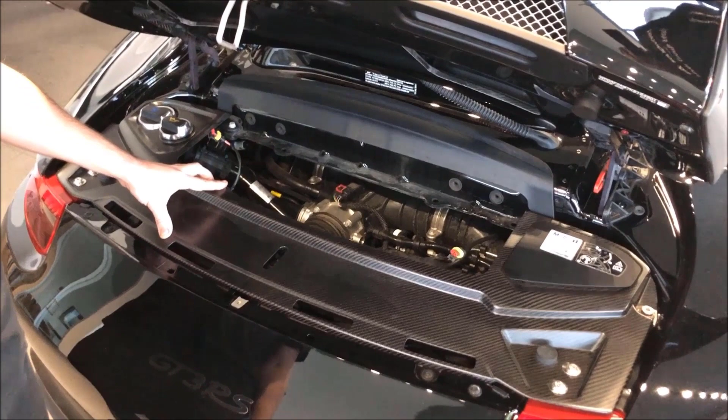Are you kidding? That's what this car is made for. Do you think the driver could flatten the curve? Wow, I like that. Speaking of flattening the curve, what engine is in this thing? This one has the Flat 6 4-liter, specifically designed in Germany just for the track. Wow, okay, so really, it's left up to the driver. Let's see if he can bring it, because we obviously know that the car can handle it. Excellent. So let's really see what a Flat 6 sounds like, to see what our driver is going to be doing for us.

Before I throw it over to the driver, he's anxiously waiting for these keys, but he will have his opportunity to drive like the way he wants to and flatten things out.

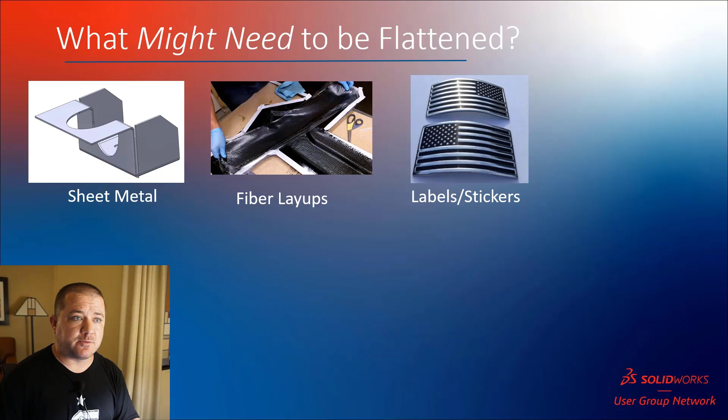When you talk about flattening things, it's important to understand what might need to be flattened. Okay, sheet metal ought to be obvious. That's the first thing that comes to mind. But what about things like fiber layups, right? You're putting sheets of fiberglass or carbon fiber into a mold. Maybe you're making a label or a sticker or something that's got a form fit over another part. Maybe you're doing NC cutting.

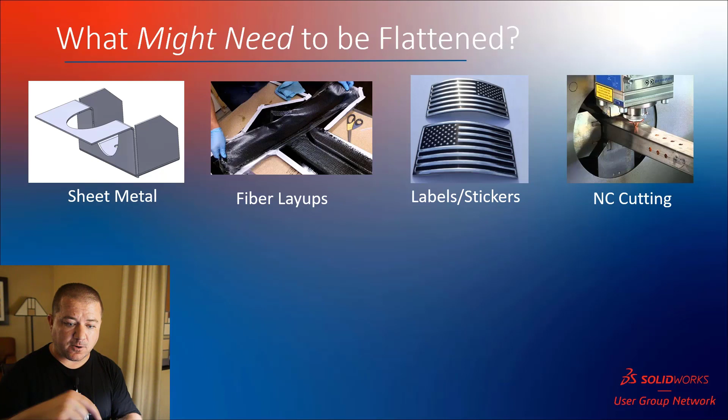A lot of tube cutters cut as a flat shape, but they're actually cutting it around the perimeter of that tube part. So you're going to cut the holes all the way around and then you're going to flatten that out and send it over to the NC machine.

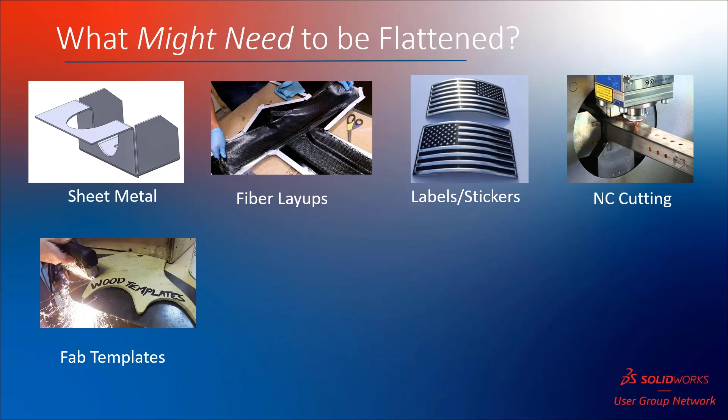Sometimes you've got fab templates where you're creating something really weird shaped or possibly something that's almost impossible to measure. And so you're looking for some way to transfer the design using paper or something else that tends to be flat. You start to get into things like fabric and upholstery, then you start to get into stretch, and that starts to get a little bit more complicated.

Thermoforming, you don't generally actually need to flatten thermoforming. I always thought thermoforming would need to be flattened, but you're always taking just a rectangular or whatever the machine takes, and then you just trim it off when you're done.

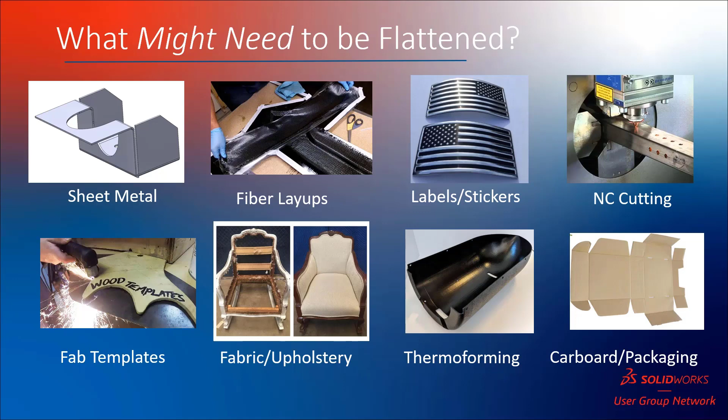So keep that in mind, that sometimes you need to flatten something, but the flat pattern is actually not important at all because the machine needs to have square stock. We also got cardboard, packaging, all kinds of stuff. The possibilities of what might need to be flattened is a pretty big list.

The question then becomes, okay, why do we need an accurate flat pattern? Because a flat pattern, I'll just give you a rectangle every single time, and as long as it's a big enough rectangle, boom, there's your flat pattern, right? Just trim to fit, beat to match, beat to fit, paint to match, right? So we want accurate flat patterns so that we can avoid trimming, which doesn't always apply. Thermoforming doesn't matter.

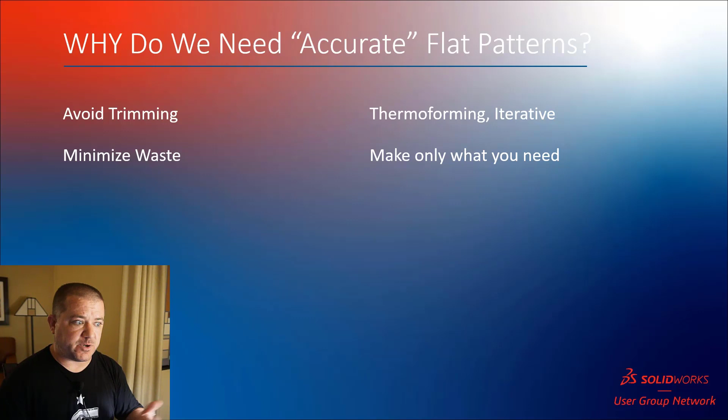An iterative design process. If you're not married to the design, you don't actually care about the extra time it takes to trim a prototype. So don't worry, does it really need to be that accurate? You do want to minimize your waste because you only want to make what you need. So trimming extra stuff not only is wasted energy, but it's also wasted material that you could have put into another part. You want to eliminate those extra operations.

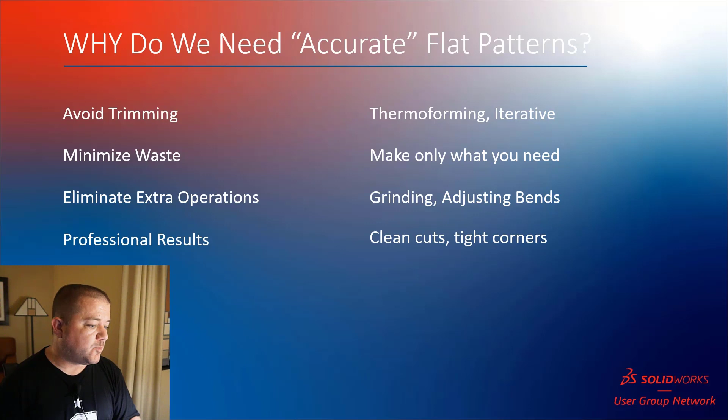A lot of times I find that if the flat pattern isn't right, you find yourself sort of trying to dial in the bends. You want your bend locations and your flat patterns to be perfect so there's no sort of excess at the end, no remainder. You want it to look really professional. You want tight, clean corners. You want to take advantage of the ridiculous accuracy that you get on a CNC machine, right?

Whether you're talking about a router, laser, plasma, whatever, you can flatten something and cut it out down to 1/1000th of an inch, generally speaking. Not necessarily repeatedly, but generally speaking, it's super accurate. And so then you can take that and use that as your assembly guides. You can make highly accurate parts, even though they need to be formed up.

If you know your parts are going to be accurate, you can get the parts out the door faster. You don't have to make a bunch of extras. You can just say, yep, I need 5. I'm going to print 5. I'm going to bend 5, and it's going to be perfect because I know it is every time I've got it dialed in.

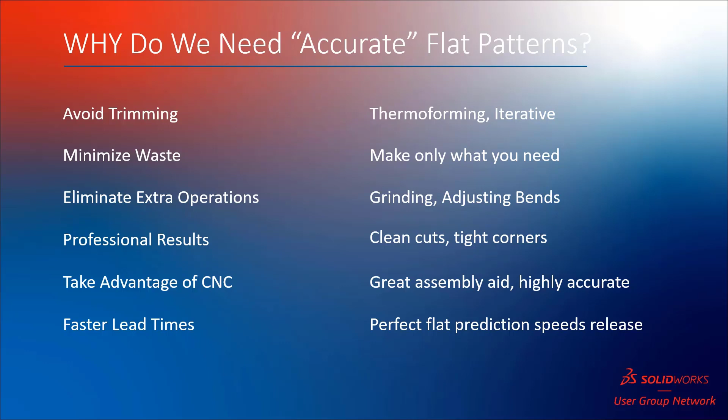Let's talk real quick about the anatomy of a sheet metal part that is a challenge to potentially work with. So what you end up doing is you look at a part that's crazy, and you say, okay, I could do it a lot of different ways, but first things first, focus on the largest part of the bends. Trace the outline and use a base flange, or if it's a rolled form, draw the arc of that roll. Try to get the bend in there first, because if you build the bend with sheet metal features, it's going to be a lot easier.

Now, for a really challenging part, you may have features that need to be added to the bent part, as well as features that need to be added to the flat part. So in this case, I'm trying to create a perfectly oval sticker or placard or something like that. And so I create the nice roll, because I'm not going to be able to roll it very well after it is turned into an ellipse or an oval. So I create the roll, I flatten it, I cut the ellipse out, and then I fold it back. And the flat pattern must solve.

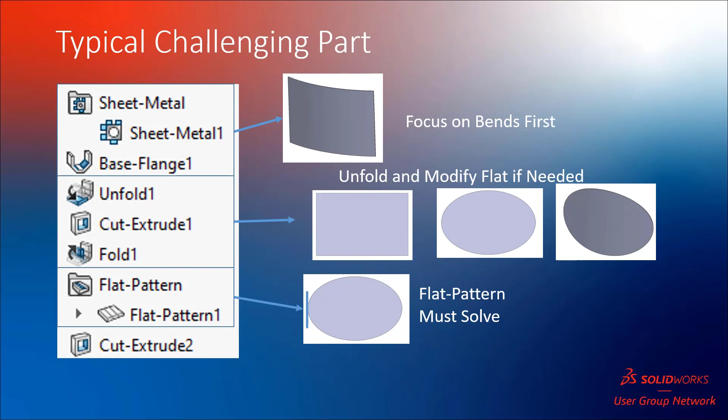Now, you may think, okay, well, that's obvious, but for those of you that have tried it, you know that at least in the past, you had to have at least one small straight edge to roll that back out with on a flat pattern. And so what I did here is on my ellipse, I left the tiniest little straight edge. And that straight edge allowed it to flatten, and then I did some cleanup at the end.

So that's kind of how a lot of these parts end up going. You end up working on it in multiple phases: the bent, the flattened or semi-flattened or in-process flattened, the flat part, and then anything after the flat part that needs to be applied to make that work.

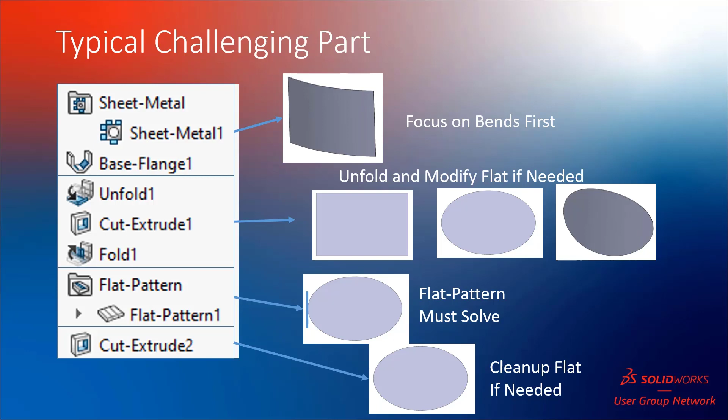All right, let's talk about the rules. Sheet metal has rules, and just like rules in the real world, if you break big rules, you got big problems. If you break small rules, you probably get away with it. Nobody's going to care. And if you break enough small rules, you're probably going to be cruising for trouble. So follow the rules when possible. If you can't, I understand. SOLIDWORKS is probably going to take care of you, like we'll see here in a second.

So one rule: constant thickness. In other words, if you're going to have 16 gauge sheet metal, it's got to be 16 gauge. You can't create a chamfer on one edge and sharpen it, because that creates a situation where it's not the same thickness there at the corners. So constant thickness. The exceptions being that you can create non-normal cuts and do a lot of stuff with them.

Also, if you have something that's going to end up stretching, like a formed part that's drawn out, theoretically that's going to change thickness in the real world. We're not going to calculate that. We're assuming the thickness stays constant even though you're getting a bunch of stretch. Sometimes with imported parts, the constant thickness is messed up, and sometimes with convert to sheet metal, you can't have it flat. You don't want it to be thin. You want it to be a big chunky block, and then you just convert it.

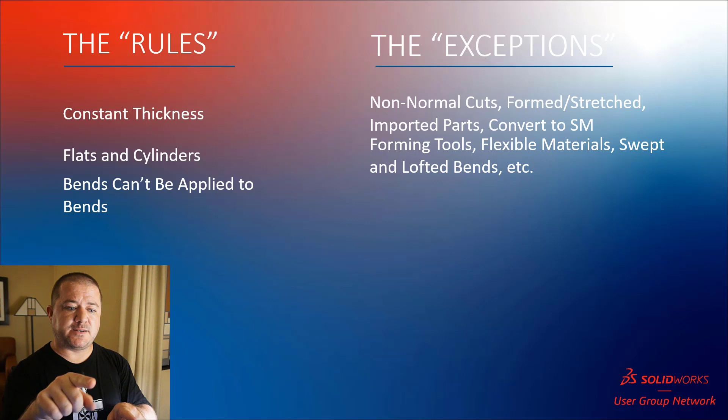You can't apply bends to bends. I don't know, 2020, they've changed this. If you're on an older version, this does apply. It used to be an arc touching another arc with no straight in the middle would be a problem. Or even worse, an arc that then just took off in another direction. That's a bend on top of a bend that's going to get added on top of another bend. It just gets crazy. SolidWorks is like, you know what, I'll just take care of that for you. So if you've ever run into a problem in the past where your lofted bend or your swept bend didn't flatten, it probably does now with no problem. It's just boom, automatic.

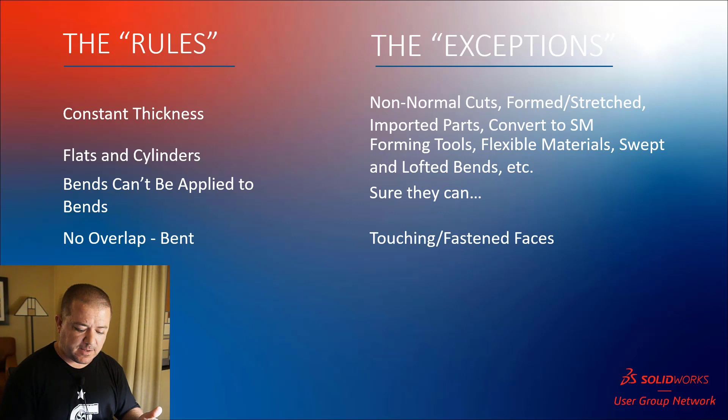You can't have parts that are overlapped. For instance, when they bend, if the parts are overlapping or intersecting, it can't physically happen, and it can't intersect in the flat. But there are times when, for whatever reason, you need to cheat, and SolidWorks generally is okay with you cheating. It generally gives you ridiculous, impossible things and lets you decide, is that something that I can accommodate through other means, right? Through stitching sheets together to create a flat that's impossible from a single sheet, but maybe it's from multiple sheets. Or maybe you've got two parts that need to touch because they're going to get spot welded together. Generally, that's going to work out fine, but just keep in mind, if you can keep a small gap in there, you're going to be better off.

The part needs to be manufacturable, and of course, this is all sort of just up to you because you're the one that's stuck with it if you can't manufacture it. But there are some really cool tools out there where you can create completely enclosed cubes, for example. I mean, if you're making it out of a piece of paper or cardboard, then you can bend anything, right?

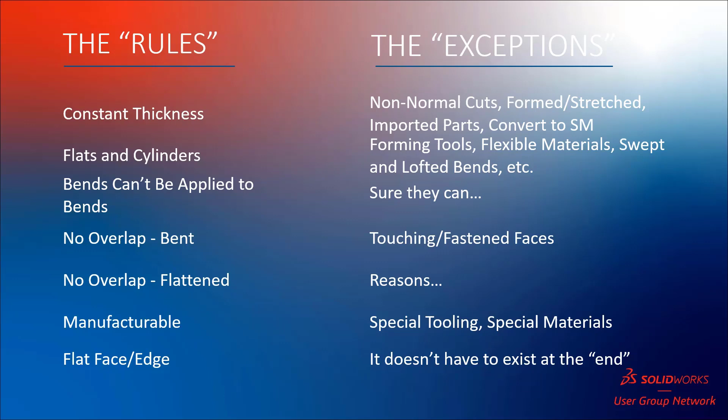So the last one, you need to have a flat face or a flat edge, and that's because the flat pattern feature at the bottom of the feature tree has to have something to say this is the fixed edge or fixed face. It's got to flatten relative to some fixed object. So make sure you have a flat face or flat edge. That one's a pretty good one, although keep in mind, kind of like with that elliptical label example I did just a second ago, you can have a flat edge that exists in the flat pattern but then gets trimmed or eliminated after the flat pattern in a post feature. Okay?

This is required knowledge. You need to understand bend allowance, bend deduction, K-factor, etc. Generally speaking, when you go and talk to the guy that runs your brakes, the guy that runs your lasers, everybody that works with sheet metal, and you ask them, explain to me what bend allowance is versus bend deduction and why would I use one or the other, you will get a different answer from every single person you talk to.

The thing of it is, bend allowance, bend deduction, those are old school AutoCAD 2D rules of thumb. They work really well, but they were based off of the same dies on the same material, and if you have a different bend angle or a different bend radius or a different die set or a different humidity in the air, it's going to stretch a different amount. And you'd have to manually keep track of this all. So I don't recommend using anything but K-factor, just for simplicity's sake. I'm lazy and you should be too.

So K-factor is usually 0.3 to 0.5, and the idea is K-factor is the percentage through the thickness that you're not getting either compression or expansion in the material. When you bend, it's compressing on the inside, expanding on the outside. Somewhere along there is a neutral line. If it's perfect, then that neutral line is exactly halfway through, and that's a 0.5 K-factor, which is the default SOLIDWORKS value. If the material has a tighter bend, if it's a thicker material, you'll start to see it drop lower down to about a 0.4, 0.35, 0.3 on the max side.

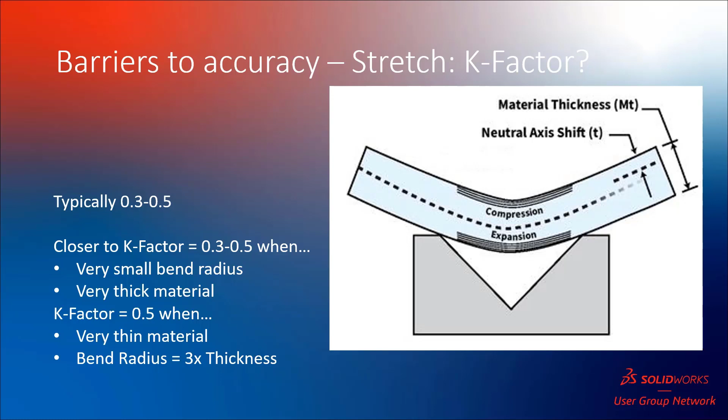So if you don't know what your K-factor is, make a 2-inch by 2-inch plate, apply a 90-degree bend to it in SOLIDWORKS, and then go cut a 2-inch by 2-inch plate really accurately, bend it, and sit there and measure it. And what you need to do is adjust your K-factor until the measurements you get on your sample part match what SOLIDWORKS is calculating.

It also helps to understand which direction you're solving for, because depending on what direction you're solving for, that's going to be where that K-factor applies. So for example, let's say you're doing a rolled cylinder, you know what the diameter of that rolled cylinder needs to be, you know the folded part. You design it in SOLIDWORKS, you solve for the flat. If you adjust the K-factor, that tube will not change size, but the flat will. It'll get longer or it'll get shorter.

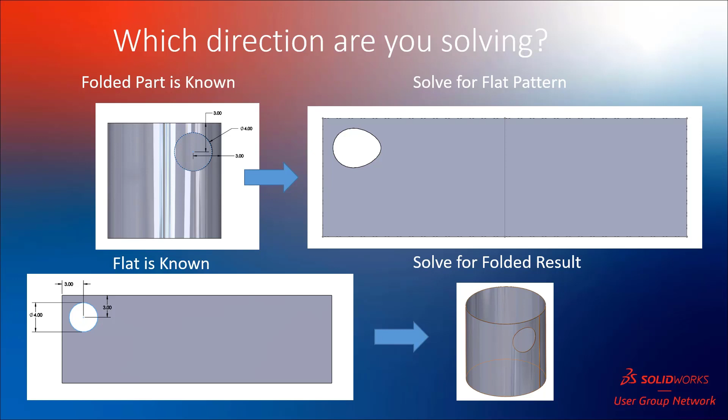Now if you know what the flat needs to be, such as you want to cut a round hole because you're using a punch, but then you're going to roll it up and you want to see what the shape is, you'll build it in the flat and then you'll roll it up. In that case, the K-factor is applied to the folded part. You always have to start with one or the other, and in fact you can mix and match, but every feature has a design intent. The K-factor is translating from one design to the other.

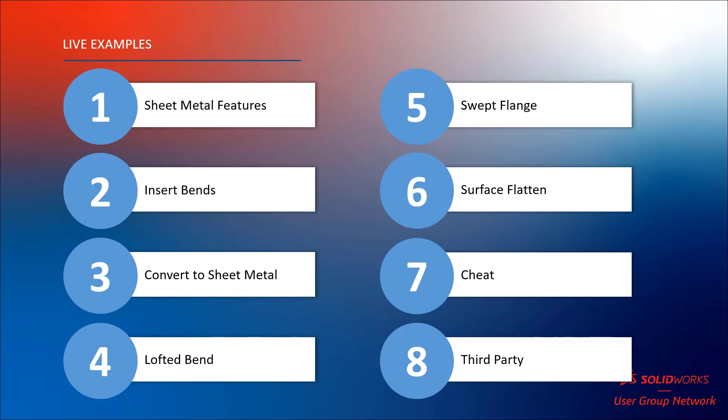And what do I mean by one design to the other? I mean you've got 2 designs. You've got the flat and the folded. And they differ by, theoretically, a K-factor, and that's it. But in reality, sometimes you've got to get more creative than that. So let's do some examples. Let's start with just some regular sheet metal features. Just do something fun here.

So I'm going to go ahead and create a new part. Real simple. And when I do a new part like this, especially in sheet metal, I like to just kind of try to get as many of the bends in there as I can initially. Then let's just create a weird shape. And we'll come up here to sheet metal and do a base flange.

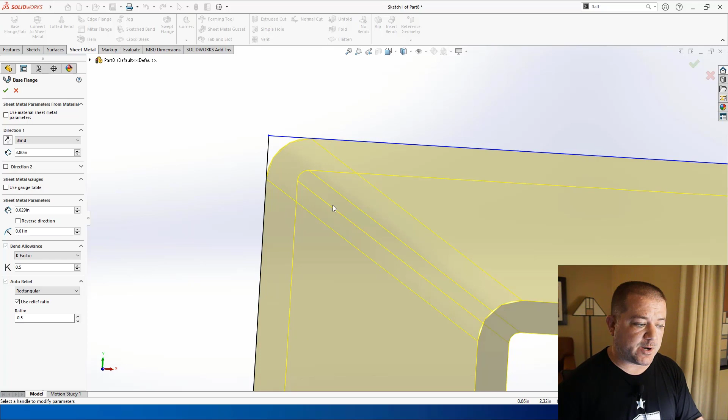When you're doing sheet metal, you're almost always either going to be right on or you're going to be off by a thickness or 2. Because if you're not paying attention to the thickness being to the inside or the outside, classic design intent mistake, you're going to have problems. So we're not focusing too much upon the sheet metal specifically, but if I come in here and I draw an open profile and I do a base flange, it creates a sheet metal part.

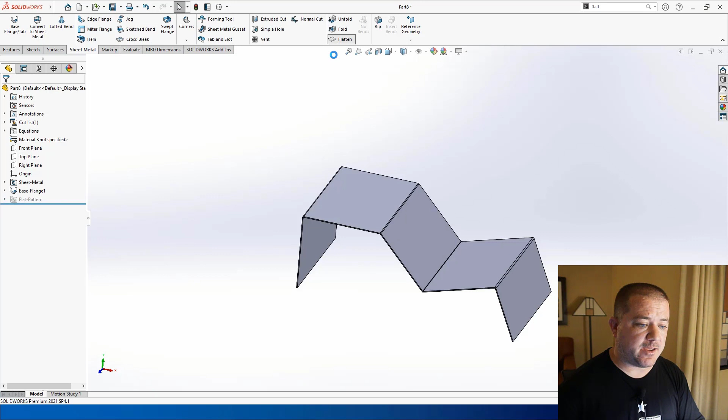And as long as you just periodically check, yep, it can be flattened, you're good to go. Now keep in mind, you had to have a flat face or a flat edge.

That's because this flat pattern feature specifies where it's flattening from, and that stays put. So if you ever decide, no, I want this to stay put and everything flattens relative to that, you can do that. I kind of liked it the other way, so I'll switch it back real quick because that one seems more convenient.

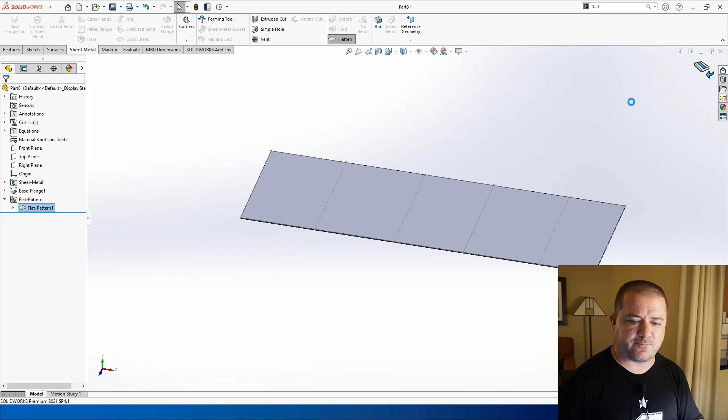But if you ever have your flat pattern off at some weird, crazy angle, pick one that's sort of square with the world. You've got a bunch of other features, and as long as you do something in sheet metal and SOLIDWORKS says it's a valid sheet metal feature, you should be good to go.

So here's an edge flange, and I'm just going to come in here and modify this a little bit to make it line up. That looks pretty good. This one actually blew up, probably because I tried to overlap.

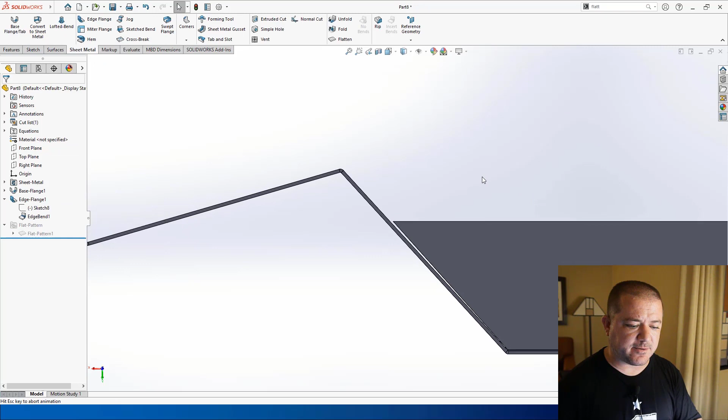Remember what we talked about, you cannot have overlapping parts or touching faces. So we'll make this where it's not so mad. And I've got auto rotate normal turned on because this is a brand new install, we'll tolerate that. Okay, so there's an edge flange. It flattens, no big deal.

You've also got miter flange. If you do a miter flange, here's a little tip: grab the edge you want the miter flange to start at, near the edge where you want to draw it, then hit the miter flange command.

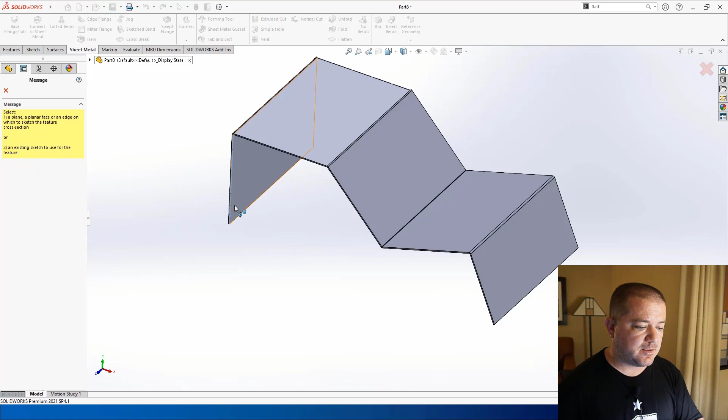Oh actually, you got to do it the other way around. Do the miter flange command, then click the edge. It creates a plane with the origin at the point, and then as long as your profile is attached to that origin of that sketch, you're good to go.

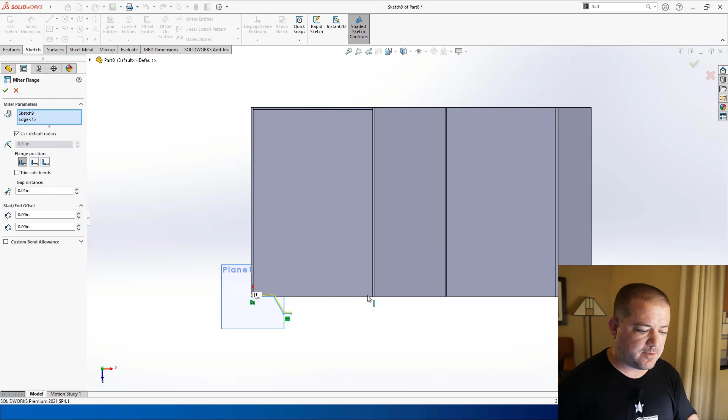So I'll just do one of these little dudes and click OK. Just freestyling here, and propagate tangency goes through and does a nice job of taking that shape and creating a whole bunch of ends really quickly.

Again, let's check and make sure. Yep, flattens no problem, other than that's interesting.

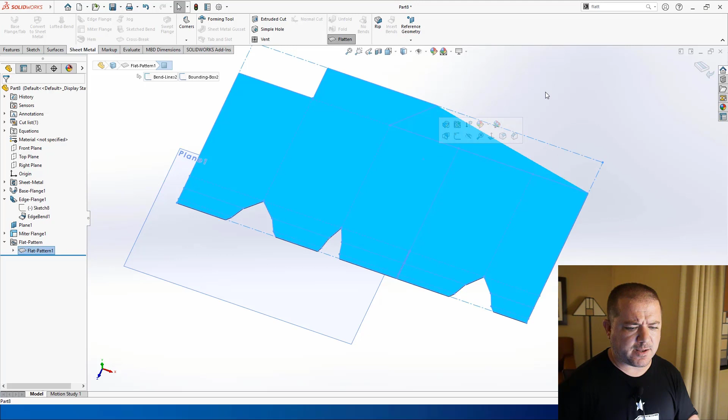So that guy's giving me trouble. Let me try one more time real quick. I'm going to just turn that back to vertical and see what that looks like, because I don't really want to create a problem that later on is going to bite me, because I'm going to do some weird stuff.

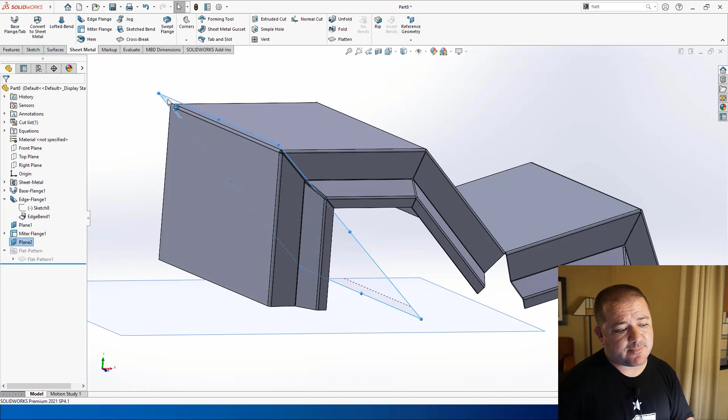All right, next thing I want to do is create a cut. This is one of my favorite tips, with the new plane feature back in, I don't know, maybe 2018. You create a plane, pick a couple faces, create a plane, and it creates your symmetry. It back calculates a symmetry plane, which happens to be a perfect 45 on two normal faces.

All right, I want to run a pipe through all these faces in the sheet metal. It's a pretty common thing. Sheet metal has some hose, some structural pipe or something like that going right through it. So I run this cut all the way through, all in both.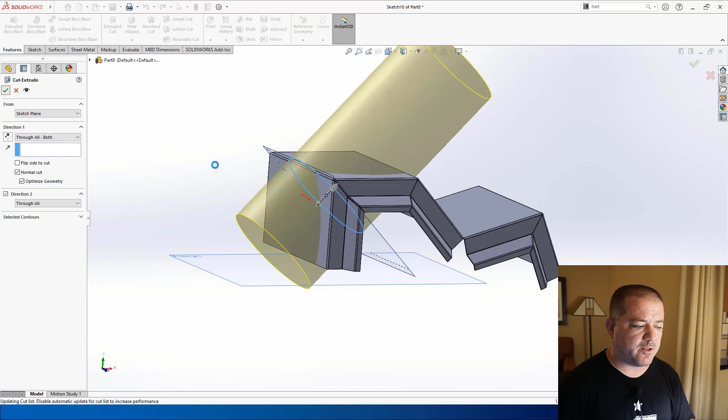And by default, it turns on normal cut. What we mean by that is it's going to cut a straight cut normal to the surface, so that when you flatten it over here, you've got nice, clean, straight cuts and everything's fine.

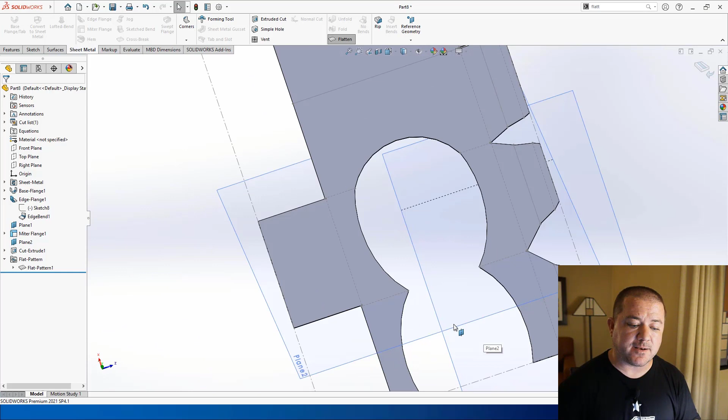If you want that to have sharp edges, you can turn off the normal cut, but you're going to break a rule. So if you're using an old version of SOLIDWORKS, this is now going to hate you. But check it out, it's got a really sharp edge right there. It's going to slice your finger while you're holding the part, unless you deburr it.

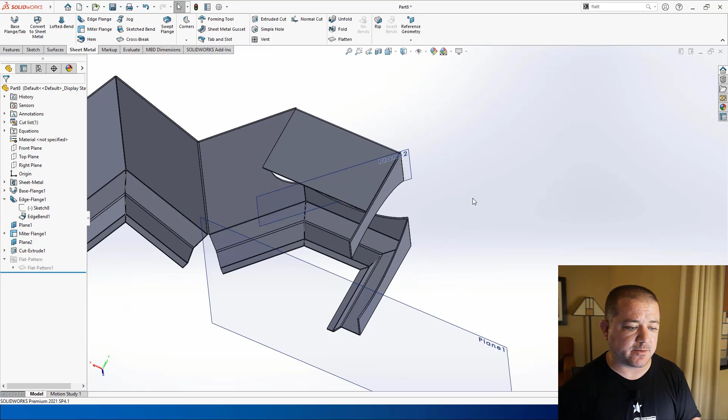But it'll still flatten. Yep, don't call me a liar, SOLIDWORKS. You break enough rules and SOLIDWORKS gets a little touchy. But you break a couple rules and generally SOLIDWORKS is going to totally be fine with it. All right, so that's looking pretty good.

At this point you kind of get the idea, right? If you start with sheet metal features, you stay with sheet metal features, you should be fine. It's going to work out. That's the easiest thing you can possibly do.

Insert bends is a really great way to take a part that's theoretically already sheet metal and add sheet metal features. So if you've got a bunch of old Pro/E sheet metal parts, step files, old AutoCAD 3D parts, whatever, insert bends is absolutely the way to go.

It does have to have flat or cylindrical faces. It doesn't have to have bends. If it has bends, it'll capture them accurately. If it doesn't have bends, if the corners are square, it'll add your defined radius in the bend.

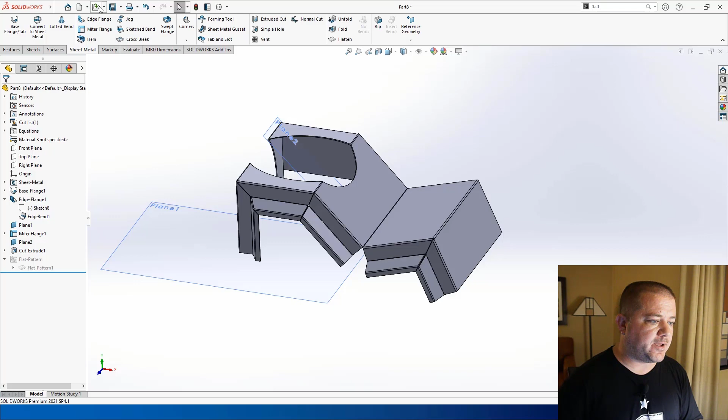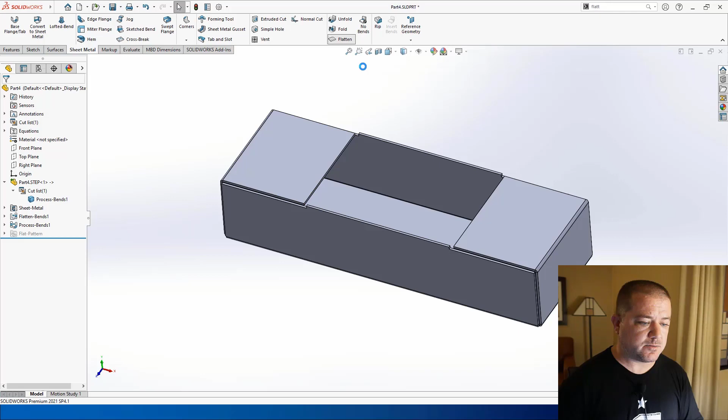So for this one, I'm going to go ahead and open up a part real quick. I've got a part on my desktop that I created earlier. I had another example but couldn't find it - this is an imported step file, and it's just a dumb, for lack of a better word, dumb solid. But if you say insert bends and pick a flat face, Bob's your uncle, you've got a sheet metal part with intelligence.

That right there is brilliant, and you should always use insert bends whenever you can if it's an imported model. Don't use convert to sheet metal - I'll show you that in a second. That's for other things. But insert bends, man, super stupid simple.

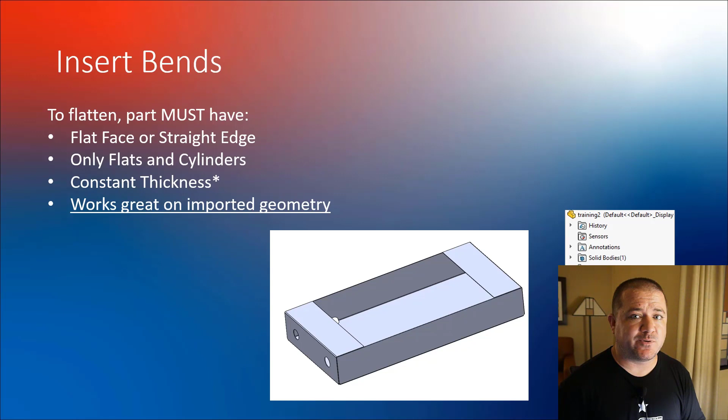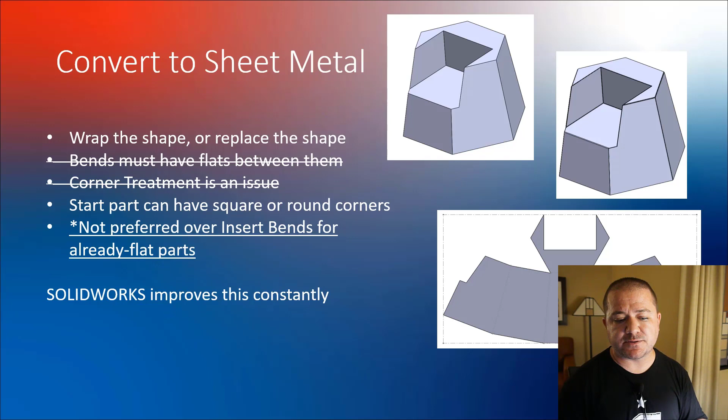Great, convert to sheet metal. Now this is one that has really grown over the years. It's constantly been improving. The corners are better, the error handling is better, the ability to handle arcs on arcs on arcs, all better. So this presentation has had to adapt over the years with the improvement in the software.

But basically, if you've got something stupid or complex, like the classic example is a hopper, and you need to reverse engineer it, or wrap it in sheet metal, or create it out of sheet metal, this is sort of the way to go. So for this one, just to show you what I would do, I like to just create a really stupid shape.

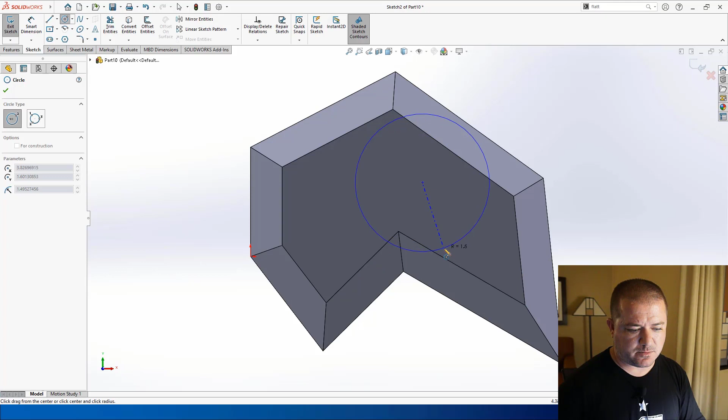I'm going to add some draft to it, and then I'm going to just chop it with... let's draw a circle. Yeah, this is a terrible idea. We'll see how this works.

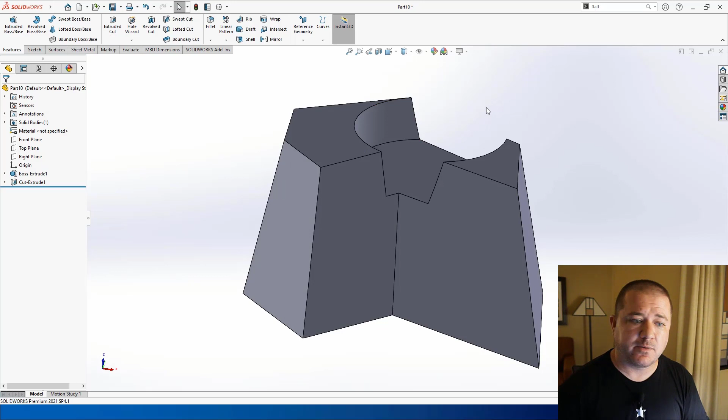All right, I want to make a sheet metal part that is this guy right here. I want to make a sheet metal housing that is that random drafted cut shape. Convert to sheet metal is your perfect way to do that.

And what it does is you say convert to sheet metal, pick a flat face, and then anywhere you grab an edge, it's just going to convert that edge. And if you kind of pick in a weird order, it'll actually flatten in a weird order.

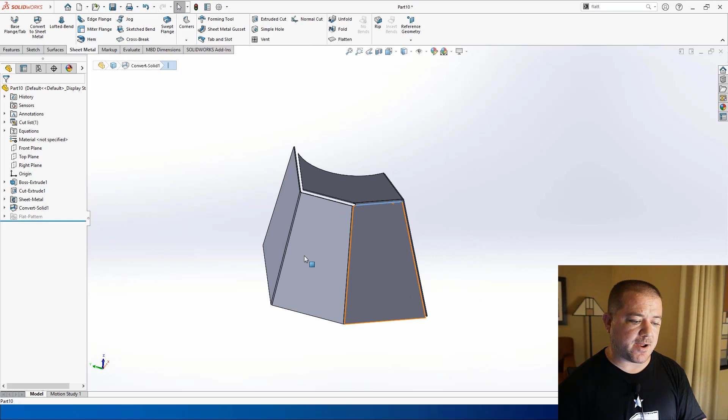So like this one right here, look at that one. If I flatten it, you can see it flattens out, but it actually created bends here, and then it sort of wrapped around the side. So depending on how you grab them will determine how that works.

Now for this one, I can't possibly make this whole thing out of one piece. If you need to create it out of multiple pieces, check the Keep Body button, and then you can just come in here and convert it again.

So let's do this one, grab this edge right here, this edge right here. Now I'm sure this is not going to work. Yep, coplanar. But let's check this guy. Check that bad boy out. I wonder if this will do it. Nope, doesn't like that one either. So we'll have to come in and figure something out later.

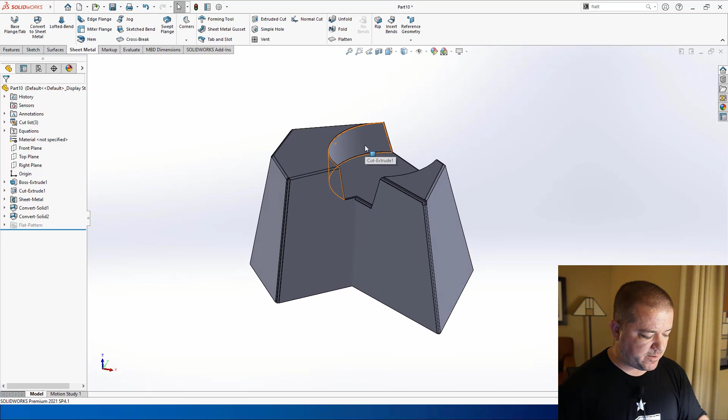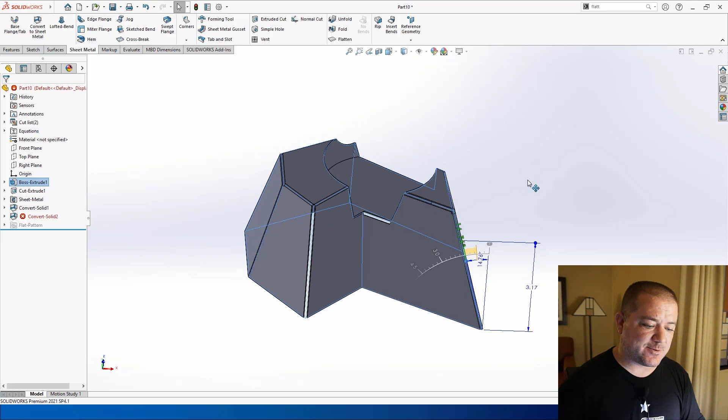But there's a couple of sheet metal parts, very quickly created. And the beauty of it is, any changes to the geometry and these flat patterns are going to update right away. Change the draft angle, whatever. Looks like I'm blowing stuff up right and left. That's what you get with a live demo, but hopefully it's enjoyable.

So just make sure that it can be flattened. A lot of times you'll see these where they overlap each other. That's on you - you're going to have to fix that.

Lofted bends, this is a really good one. The main thing to keep in mind with lofted bends is that you cannot create guide curves. It's a loft with no guide curves. Now, a lot of times people have a flipped orientation of parts. So like this auger - if I was building this auger in sheet metal, or a surface part, I would use a helix as my pattern, my path, my curve.

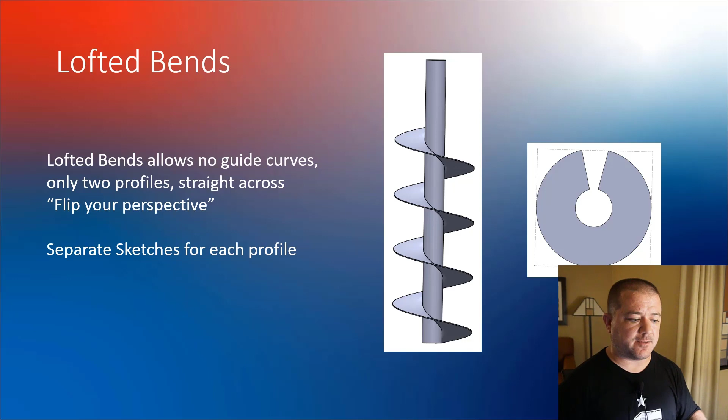But you can't use that here. It has to be straight. But if you think about it, if you use helixes as your profiles, then they are straight across to the other side. Let's make one real quick, because this is a fun one.

You basically just start a sketch. Let's do like a 1-inch hub on this guy. We'll do the first one first.

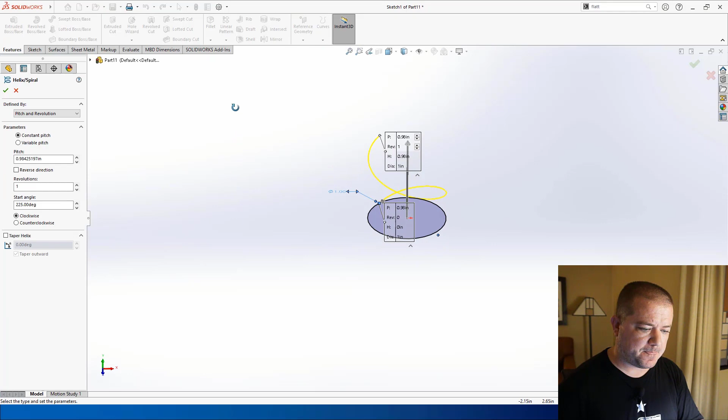We'll go in here and say helix. We want to do a 3-inch pitch, 1 revolution, starting at 0 degrees. Looks good. Now we'll do another one, start a sketch, draw my circle with a 4-inch OD. So we're wrapping a 4-inch auger around a 1-inch post. Again, we'll do a helix, same pitch, starting revolution, everything like that.

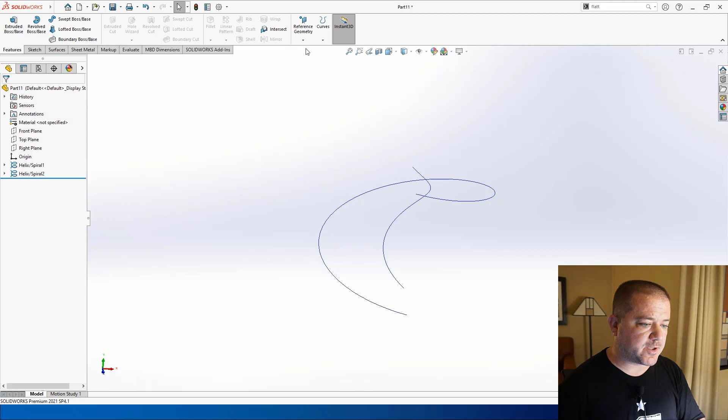You cannot create a sheet metal lofted bend from a curve, so you've got to do a couple additional quick steps. You've got to create a 3D sketch for each one and convert it. There's 1, here's 2. I find it's useful to hide my helix, otherwise you're going to accidentally grab it and the sheet metal's going to get mad.

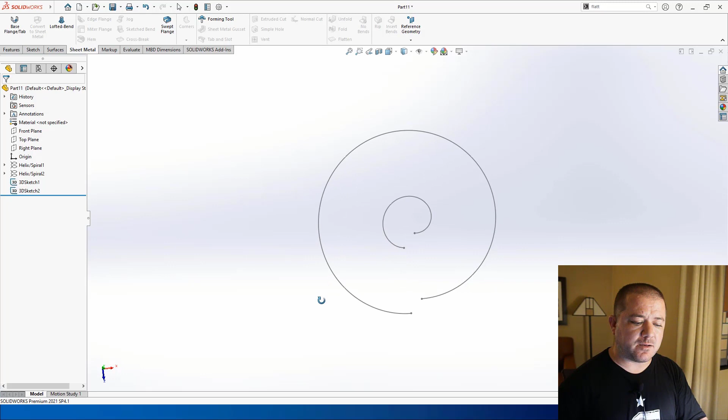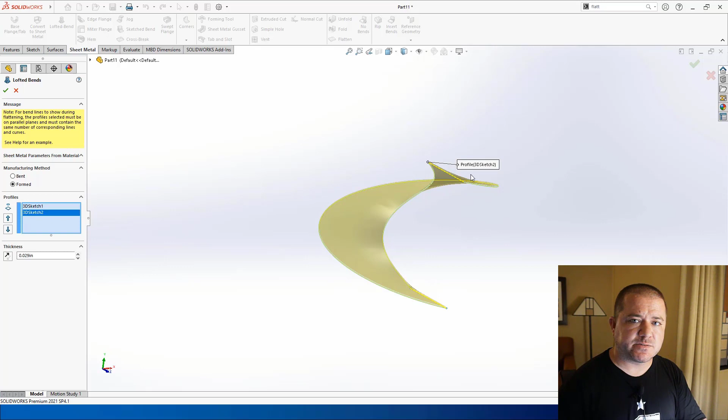But there is a loft where those would have normally been my guide curves. I can now do a lofted bend from one to the other, from here to here. Now this is going to be a formed part. You cannot approximate this on a brake press, no matter how good you are with the brake press. That ain't going to work, right? You're going to end up forming this with a hammer or something.

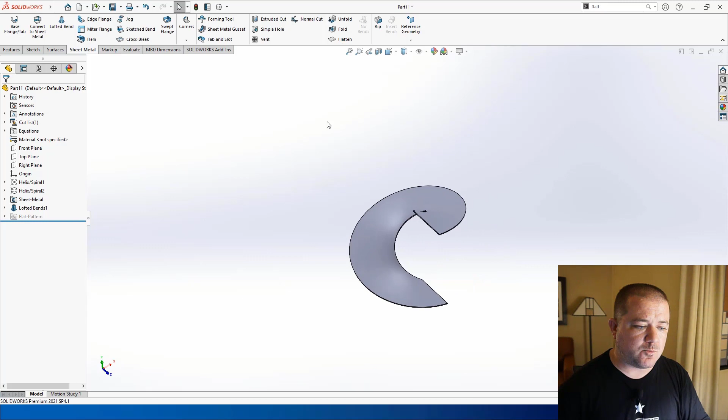But it does a nice job and it flattens with no problem, right? Makes quick work of building an auger. If you need to do one where it's going to be approximated by a brake press, that's where you're going to have that more classic square-to-round shape, or what's more common is maybe half a square-to-round.

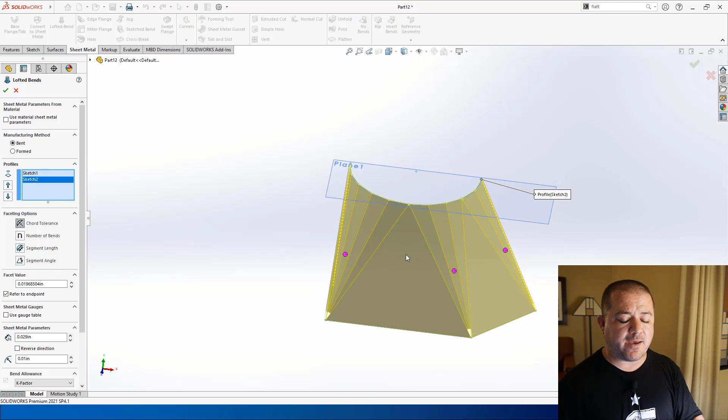So you're doing like a - let's do kind of a weird shape there, and then we'll go to like an arc here. Center point arc. Right? Lofted bend from there to there. This one can theoretically be approximated on a brake press, just like that. So if you have something that can be approximated using straight lines, you're good to go.

This used to be so much harder. You had to do straight line to straight line - they had to be parallel, they had to be connected. Now it's just so easy. This presentation has gotten so much easier.

I used to be always the stump-the-chump guy on support. Somebody's got something they can't flatten, they're like, 'Hey Marcus, you try to flatten this?' I'm like, yeah. My job's so much easier these days.

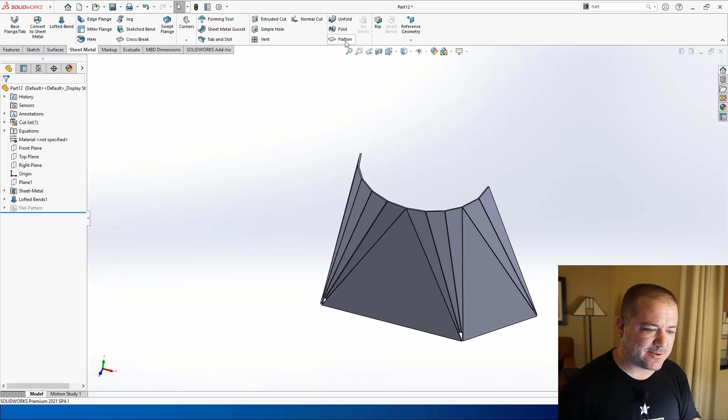So that's looking pretty good. Make sure it flattens - looks good. Feeling good. Man, SOLIDWORKS is just crushing it right now.

Now we're getting into the really weird stuff. So sheet metal used to be like the only thing you could do that was non-flat or cylindrical. Then you got into the lofted bends. Now you can do a swept flange - that's where you're going to get things like donut shapes and stuff like that. It's an open profile and an open profile, and you sweep it.

The only thing is you want to keep an eye on how you're flattening it. Are you flattening it along the path, like it's going to be rolled like seamless guttering from a straight strip? Or are you flattening it from the side, bending flanges down to form those shapes? Those are the two. I've been having problems - haven't looked at it again in a while, problems with some of the flattening on that. So it's a little bit weird, but you can get some pretty complex stuff there.

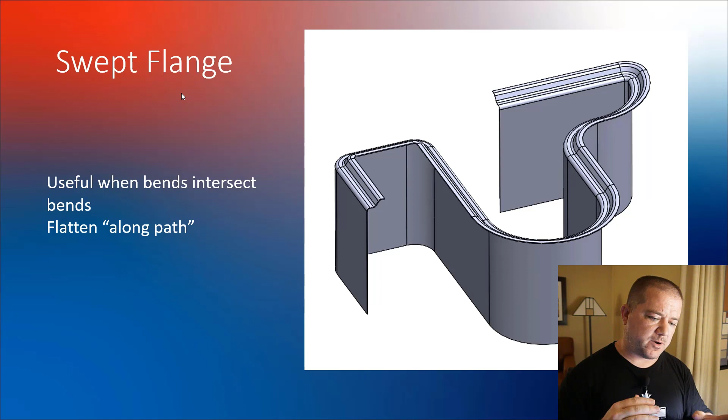Again, you may have to flip your perspective, right? If you think, okay, well I can't do it that way because it's not a single profile - what if you do it from the side, do it sideways? Surface flatten.

Right now we're getting really weird, because surface flatten is a situation where it's not sheet metal, right? The auger technically isn't sheet metal because you can't bend it on a brake press, but that depends on how you define what is sheet metal. You can do things that are non-planar, like drawing of metal. But surface flatten is when you really start to get some really crazy stuff going. It's about the most powerful thing you can do in SolidWorks when it comes to flattening things.

I was doing a sheet metal training class one day, and I said, I bet I could flatten everything. And it's kind of the genesis of this presentation. And somebody said, can you flatten an orange peel?

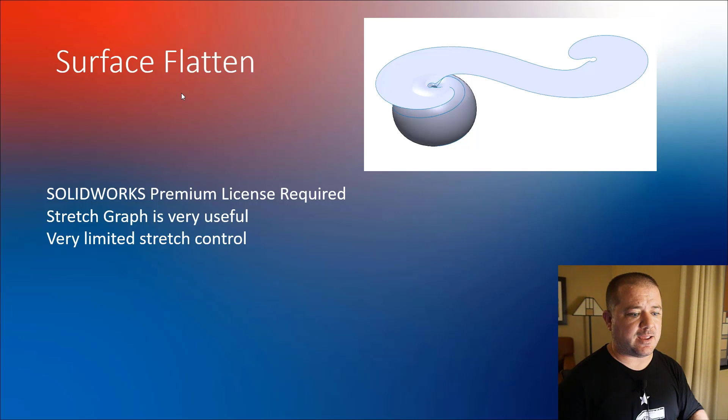And I said, what shape, right? Do you want it like a flower? Do you want it peeled in a helix? And he said, I want a helix. And so I did. And the different ways that you can do this vary because some of these get a little bit complicated. But let me roll this back here.

Here's one way that works probably better than the surfacing, because the surfacing can get a little bit difficult. You just create any shape you want, and then you go in and cut it with a thin rectangular cut. In this case, I just did it as a swept cut on a helix, and cut everywhere I wanted it to peel away, which is where the cuts would actually be, and then surface flatten. And it just flattens it.

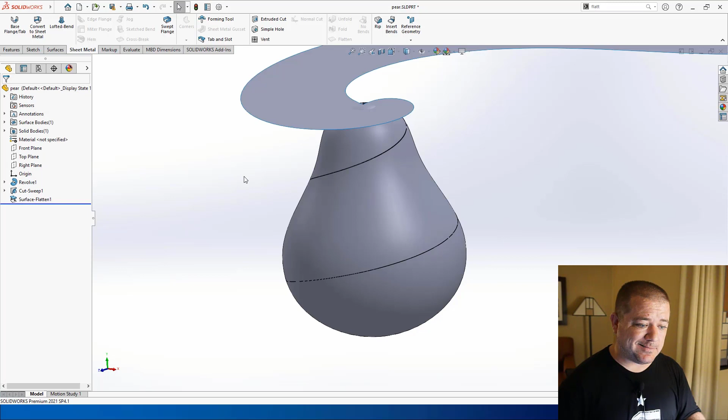And up on our social media for MLC CAD Systems, I've got a picture of an apple peel that my wife did because she knew I did this presentation, so she peeled it in a spiral, and it looks exactly like this. Every time it looks this way, and you can predict it with some really great accuracy.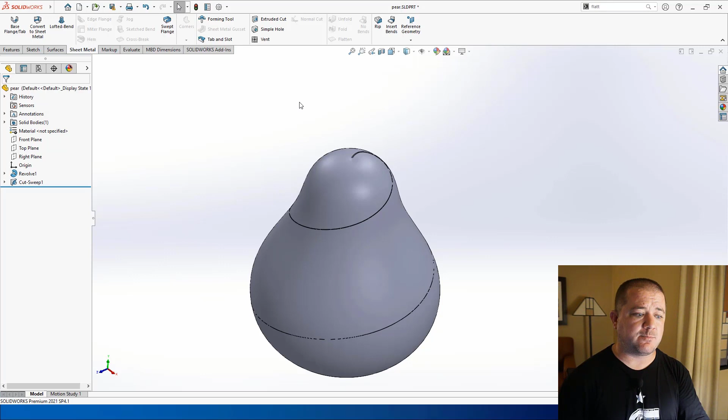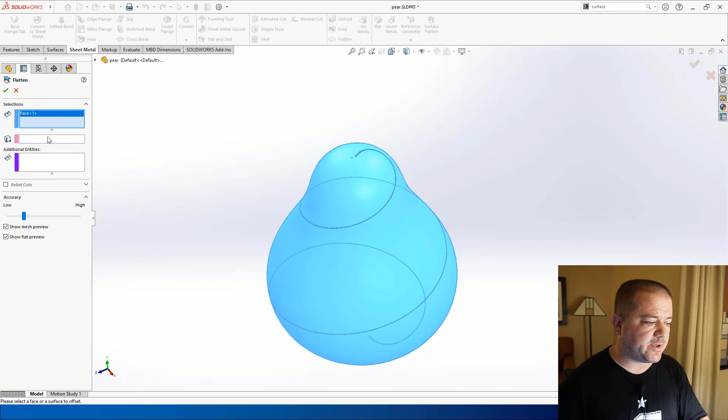To show you that last step, because preparation to here can get a little bit crazy, once you get to the point where you have something that can be flattened, you just come in and grab the surface flatten command. I usually have that on my toolbar. Surface flatten. Let me add that here. You pick the face you want to flatten, and then pick where you want to flatten it from. You have to start from a point of some kind, and depending on where you pick that point, that might determine just exactly how it does it.

But it's almost doing FEA on this thing. It just meshes it, and then it does it. You can adjust the accuracy, you can add relief cuts, but there you go. The only other thing that's worth looking at is that you can right click and turn on the deformation plot. This is where you're going to start to see it either wrinkling or tearing because there's tension or compression.

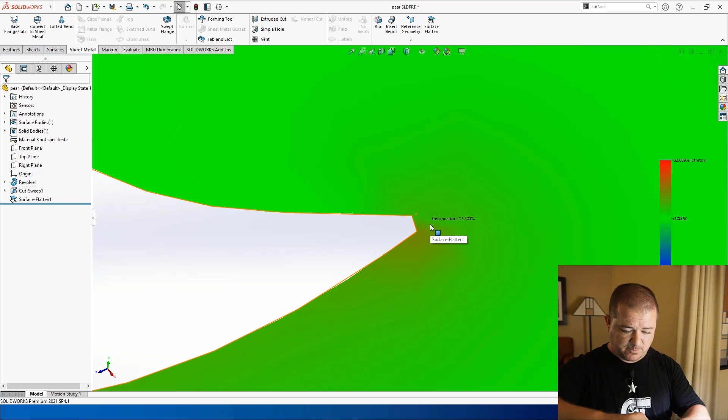So this one has a lot of stretch right there at the top, and if you've ever tried to peel right down to that nub, that stem, you know that right inside there is a lot of stretch going on because it's sort of being turned inside out. Then you get a little bit of compression depending on how thick you make the peel.

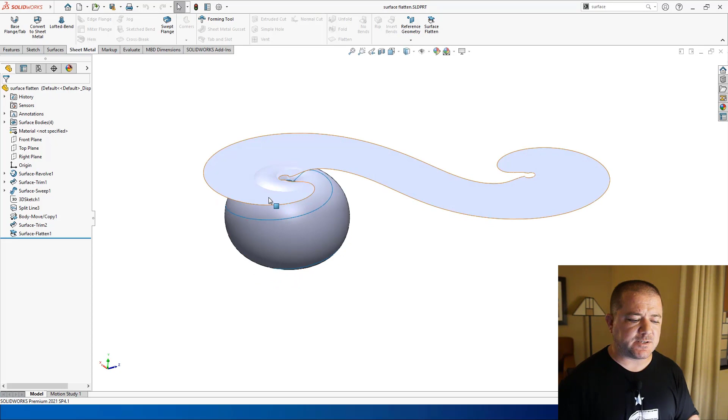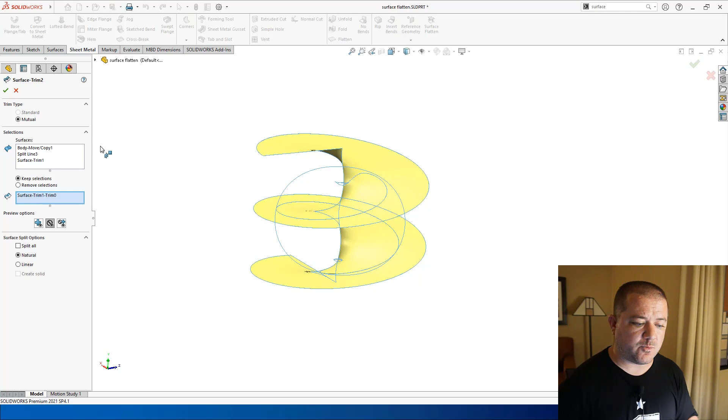I've got another one of these that I did, another approach using surfacing, but a couple of years ago that kind of broke it. With surfacing, you just have to make sure that the surfaces are not overlapping, so you typically need to cut a little hole in the middle, where you don't need to worry about that on a solid. But as long as you can trim the features, you should be good to go. Now this one, if it's anything like it was in 2020, I would try to do that and it would actually break. But in this case, this one's a little different.

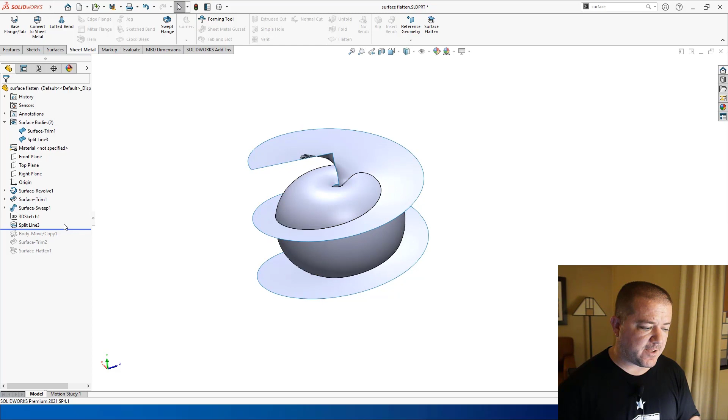I do the surface revolve, right? And then I come in and I do my sweep. And then I do some split lines at the intersection. I copy the body so that I have two very close nearby surfaces. Then I trim them. You end up with like 8 features to get this done. It takes way too much time. The solid one I did as a workaround, and found out it worked a whole lot better. I was trying to be cute with surfaces.

Which brings me to sort of the bottom of the barrel. When you can't do it another way, when you can't flatten it using one of those features, you've got to cheat. And as far as I'm concerned, cheating is totally acceptable. So for example, this was on a crimp connector where a little window was being bent out along the cylindrical face.

Now remember when I said that sheet metal needs to be flat faces and cylinders? Well, if you put a bend on a bend, normal to a bend, it creates this toroid donut shape, and that's just a no-go. You can't put bends on bends. They're constantly making it better, so they're going to make me a liar in a couple years, but this is just a no-go. But the trick with this one is you don't need to know what the flat and the bent parts look like.

You actually already know that. So why worry about SOLIDWORKS figuring it out when you can just tell SOLIDWORKS? So in this one, I did this one ahead of time because I didn't want to have to sit there and try to recreate it. But basically what you're doing, and I'll show you my feature tree, right? There is my bent part, and here is my flat part. And you're thinking, wow, that seems really simple. Bent part, flat part, right?

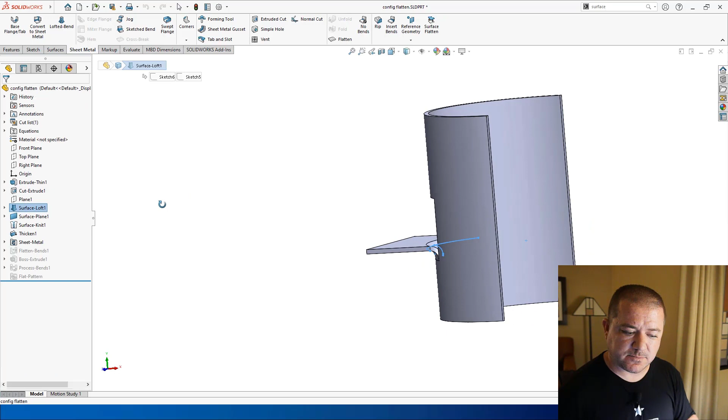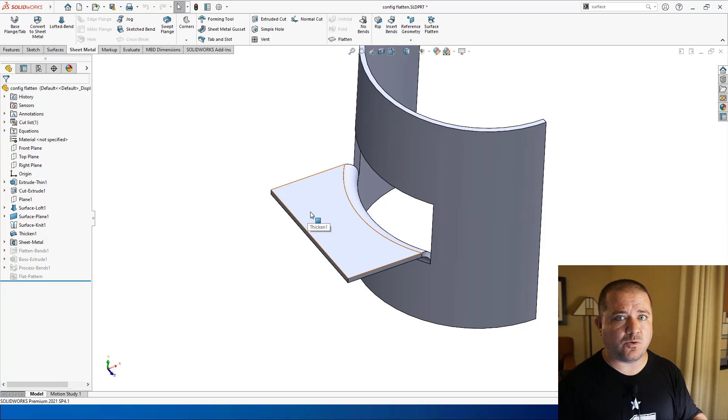Well, the bent part, I had to do a loft to get this bend region, because you can see it's a bend that's bending, a bending bend. You can't bend bends in sheet metal. I had to do knits and surface thickens and all this other stuff just to get the shape right. And the shape's not perfect because I probably need to come in and curve the edge here or something like that. But once you get the tooling and the machine that actually does this, you'll know what those measurements are and you can trim it up and make it look realistic. But I had to build that geometry completely.

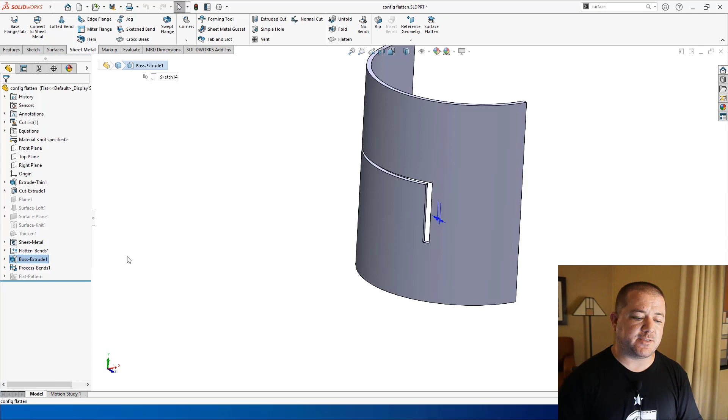And once I got that completely done, I switched my configuration. And SOLIDWORKS always creates that default sheet metal flat pattern sub configuration. So why not just save it the trouble, create your own configuration called flat, throw away all that nonsense. I just suppressed it and created the geometry that I knew I wanted. Now, is that cheating? Yeah, of course it's cheating. Does it get me my print? Yes, it gets me a perfect print. This print says this is what the flat pattern needs to look like. This is what it looks like when it's bent.

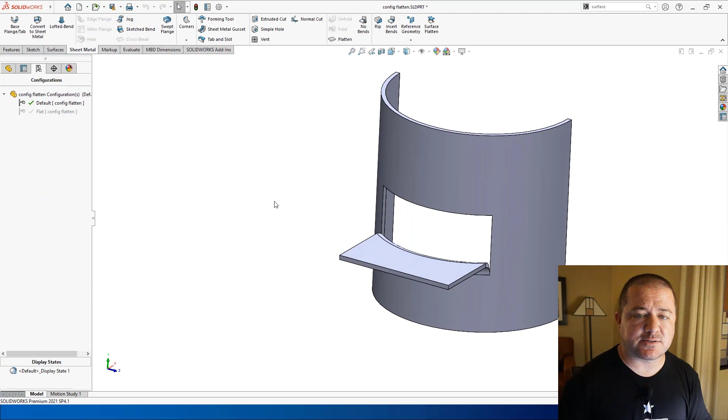Any questions, right? If you've got a feature like that where it's a bend on a bend or something like that, something really impossible, you're probably going to take the route of cheating. And that's fine. It's all good. The end result is what matters. One more note about cheating though, and it's not necessarily cheating, but it's an awesome workaround. In this case, I did a surface body. I did surface modeling to create that shape, and then I thickened it.

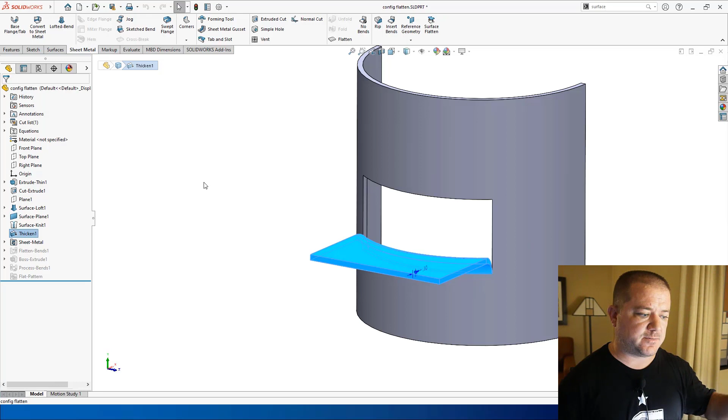If you find yourself struggling with a part that's not actually constant thickness, maybe it's a wavy sheet and you want to flatten it, but it wasn't modeled correctly, so it's not constant thickness, and SOLIDWORKS is bonking on it for some reason. Convert it to a surface. Take one surface face, knit it, or offset it 0 thickness or whatever, and then thicken it back up again. It's like an instant uniform thickness routine. Super, super cool. All right.

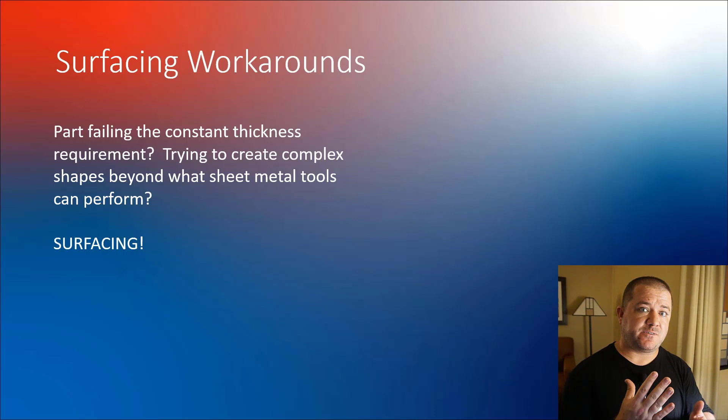In addition to the cheating, you do have other options you can explore. I'm not going to promote or endorse any third-party products, but there are products out there that have the ability to do more advanced, especially drawing, stamping operations, things like that. There are better ways to do that. I would not recommend doing progressive die stamping in sheet metal. Can you get by? Yes, but is that your best way to do it? No. Like I said, those surfacing workarounds are great because not only do you have the power of surface, but then you can do the surface flatten, or you can thicken it and then try to insert bends that way.

So hopefully this was helpful. I hope you learned something. I hope you kind of squared your brain as far as how to flatten things. Keep in mind, not 100% of everything can be flattened, especially if you go to the surface flatten, that's like cheating, right? You may not also need a perfectly flat pattern. You may have to sort of start with a rectangle, bend it up or form it or draw it or whatever you're going to do, and then cut off the excess and then measure the excess and sort of reverse engineer it that way, right? However you do it, I hope you do it.